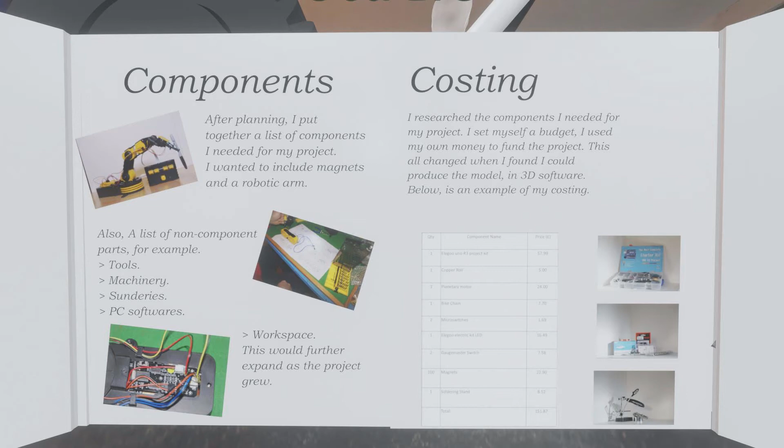Hello, one of my projects is a magnetic raft. I'm going to show you the software I used during this process.

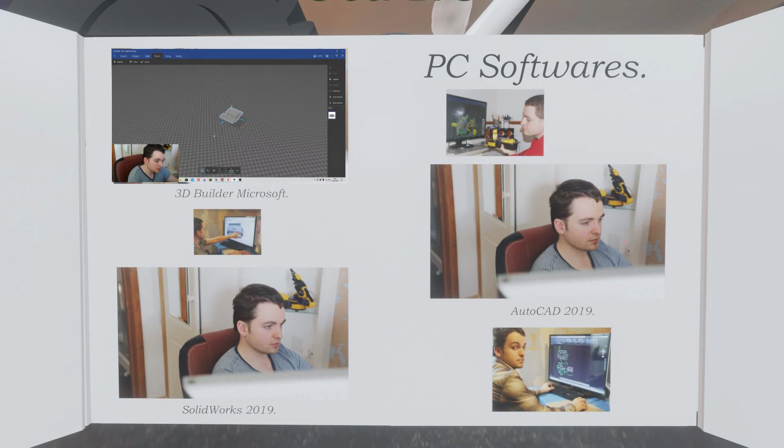This program is free on the Microsoft Store and it is an app that you can easily use, and it's quick and simple. Anyone can use it. You don't have to be technically minded to use it. It's that simple. From here, we used this app to convert all the measurements from the raft. To see this process, visit the link.

Then I'll use CAD. AutoCAD has numerous applications in a wide range of fields. The program can be used for simple projects such as graphs or presentations, or even complex designs. Some other practical applications may include interior designs, aeronautical designs, maps, and architectural designs. To see how this is done, please follow the link.

Then SolidWorks. This is the raft, the bottom part of the raft, where the electromagnetics will pass through on the inside. As you can see, I built it in SolidWorks using minimal tree features, which you can see on the left side. But what this software can do is amazing. From here I can go to simulation and test it, putting it through a series of tests such as static and frequency, and from there I get my results and see if the model is strong enough for the task it will be used for, and then it moves on to manufacturing.

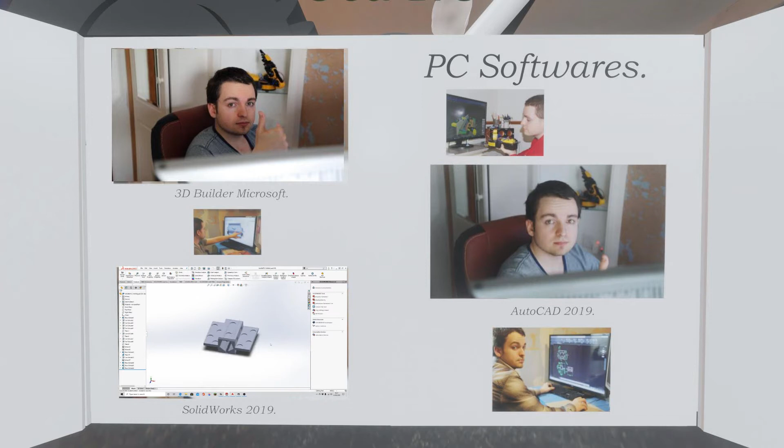This is the model I 3D printed in resin.

Prototyping using 3D printers. BIBO 3D printer. This is the final process for this prototype test model. On the right is the PLA draft model. It can be modified in the slicing software to improve the print quality.

Dremel 3D printer. This is the final process for this prototype test model. On the right is the Eco ABS draft model. It is better with the quality and much stronger compared to PLA. However, it is more expensive.

Elegoo Mars 3D resin printer. This is the final process for this prototype test model. On the right is the grey resin draft model. It is better with the quality and ideal for hobby model making.

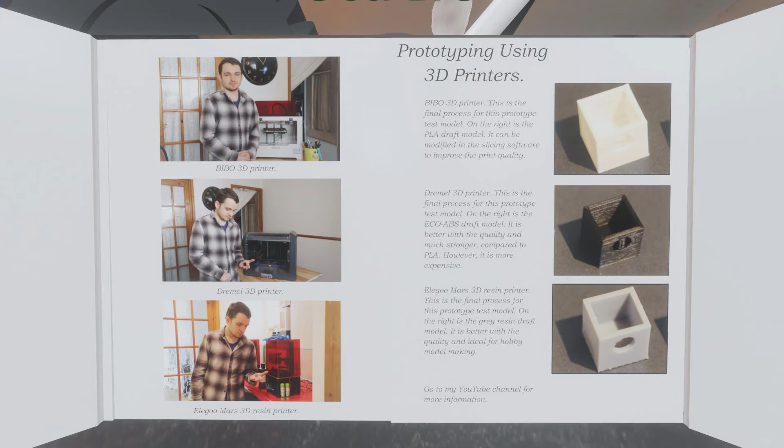Hello, this is my model. I built this using Microsoft's 3D Builder. This model shows the automation in today's industry.

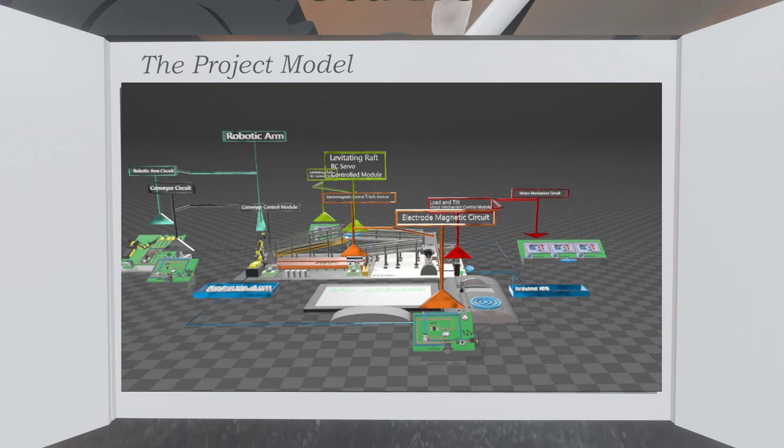I'm now going to break this down into components to show the mechanical side of the model. This is the robotic arm. It will start the process by picking up the barrel and putting it onto the conveyor belt.

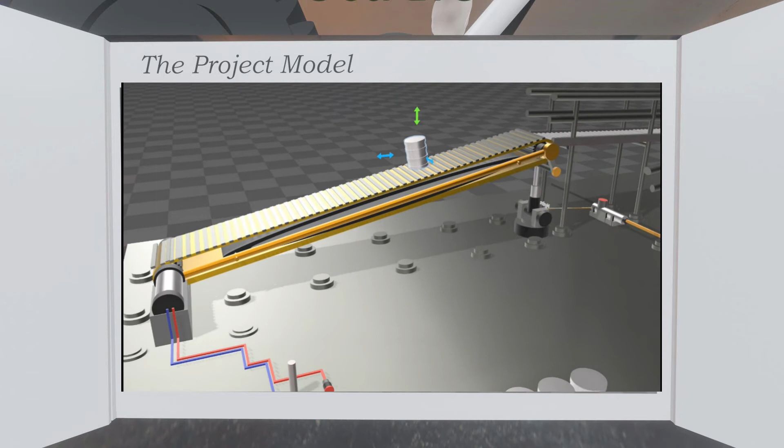This is a cage that protects the motor from the barrel. This is a motorized conveyor. I had a bit of fun here when I was recording this.

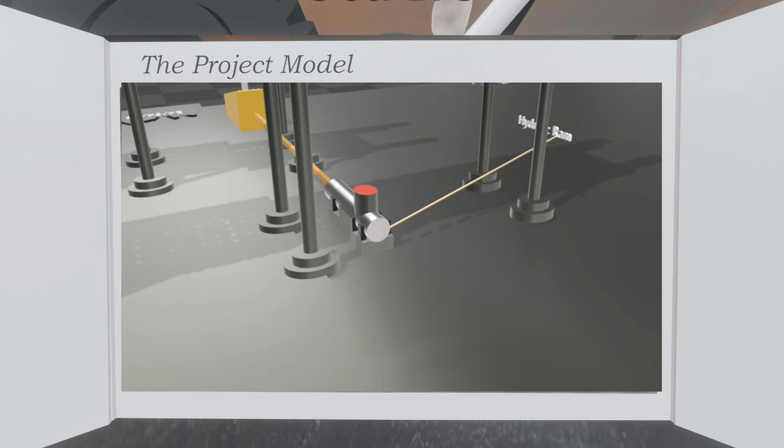This is a hydraulic ram. It adjusts the height of the conveyor belt. This is a hydraulic master cylinder, and this is the mechanism to the master cylinder.

This is a conveyor, it has rollers and uses gravity. This is an automated mechanism.

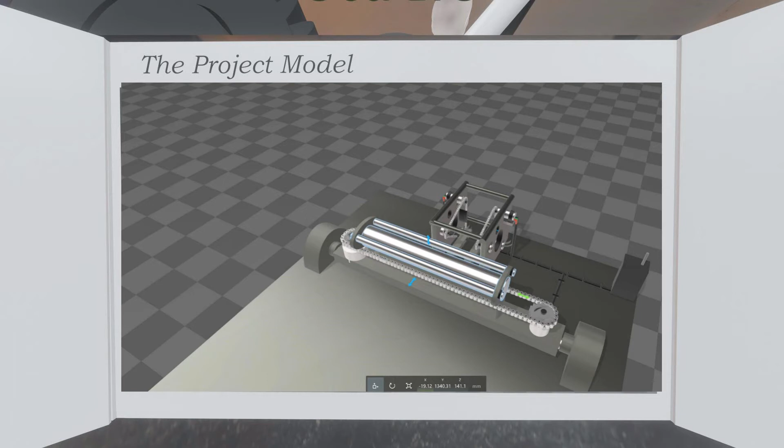The first stage, the barrel is caught into the cage. The cage would then slide along the cylinders. This is done via a chain.

This is the framework, and now this is the tilt mechanism. It tilts the basket 20 degrees.

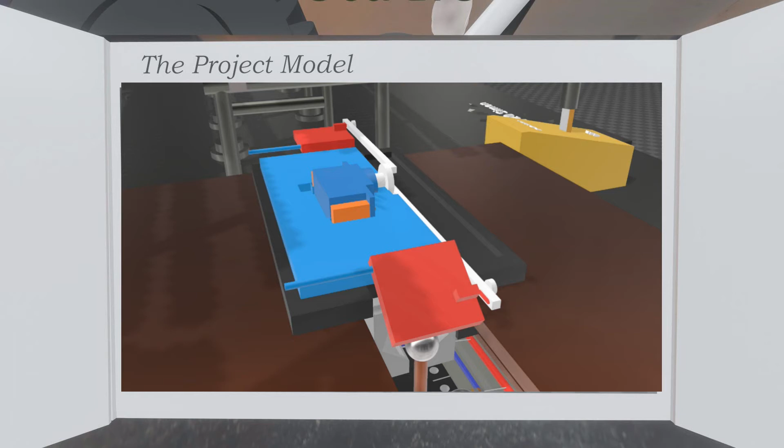This is the levitating raft. It levitates by magnets. How this works I'm going to demonstrate later on the next page. This also includes electromagnetics, which I'll talk about later.

This is the electronics of my model. So the first one is the robotic circuitry for the arm. As you can see, I've given you a side view of the arm and an exploded view of the circuit that is inside. It contains a USB PCB assembly board, and the input voltage is 6 volts.

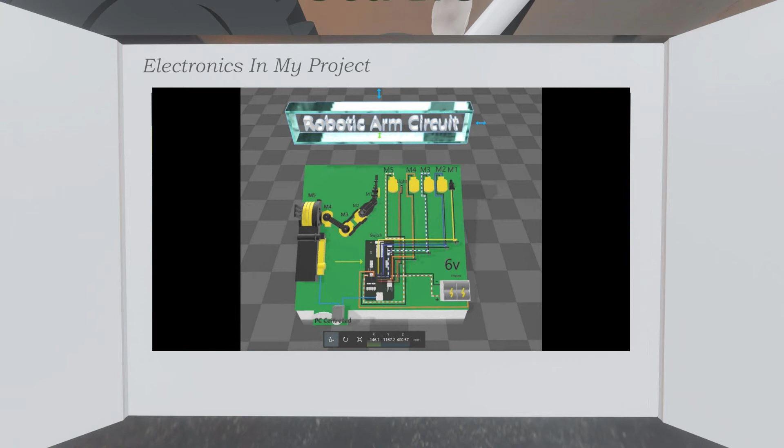And then the output range would be 1 volt to 12 volts, because the motor has a high end of 12 volts.

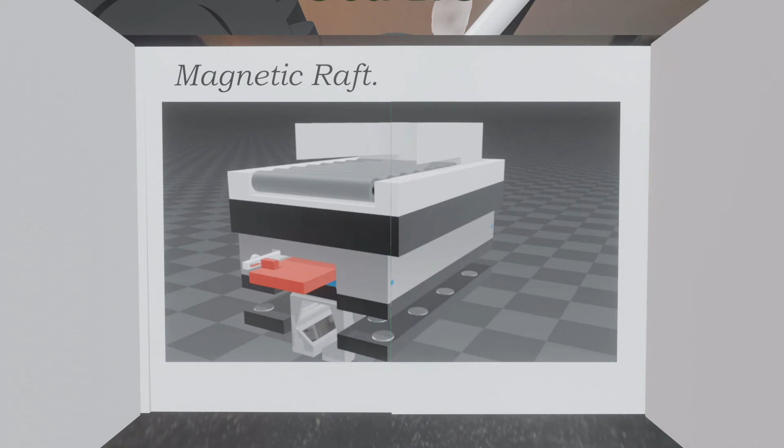I wanted to include magnets in my projects. I did some research, and from my findings I became interested in levitating and superconductive magnets.

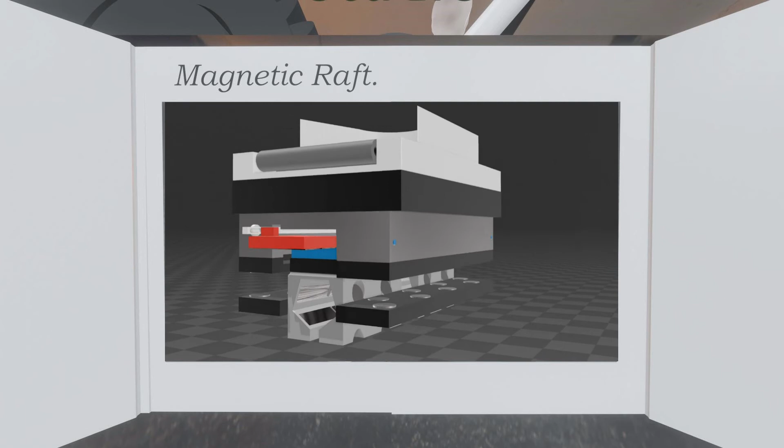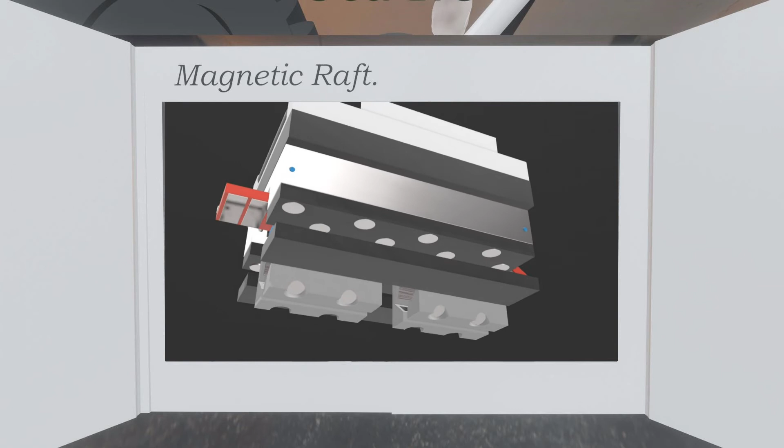This is the raft. As you can see, the raft uses neodymium magnets. The red part is the door with 2 magnets on it, and then you've got the sides which have 8 magnets like little fins, and on the bottom you have these 2 big grey blocks.

These are where the electromagnetic balls go through. This is what stabilizes the raft. The sides keep it level because it's a top heavy raft, as the barrel sits right at the top on the barrel catcher.

As we pan around to the back, you've got the other door and the other side, and you can see the arm sticking right next to the door, the white object - that will connect to a motor on the inside.

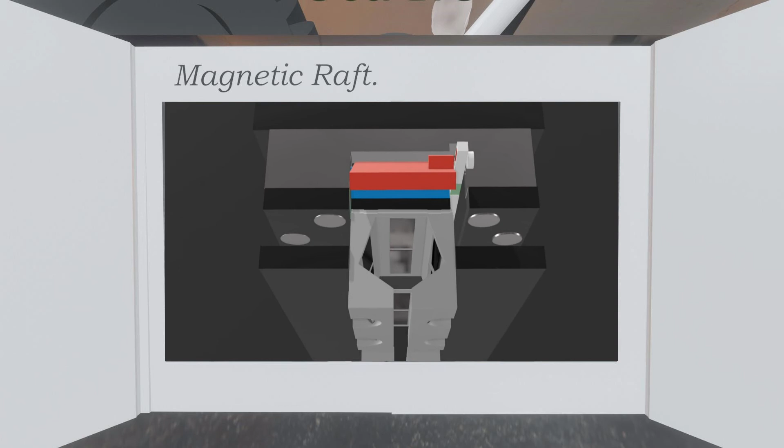As we pan down, you can see directly inside the grey objects - 2 on the top, 2 on the sides, and on the bottom bit where we can't see is 2 more, and this will be mirrored on the other side as well.

This would then glide between the copper sheets on my model. This is the electromagnetic part of my model.

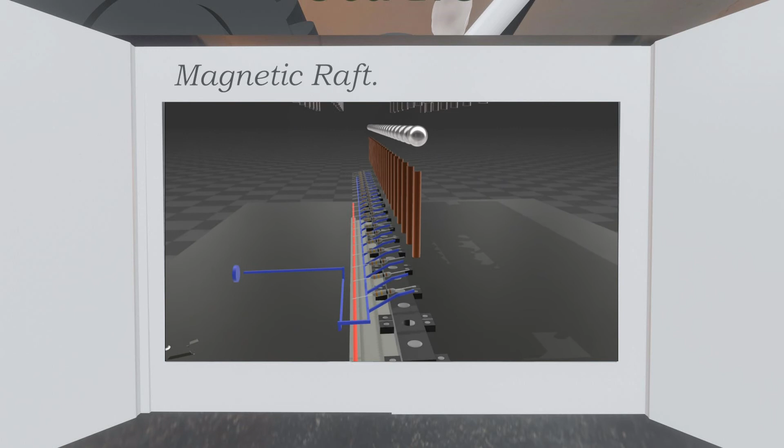Then you've got the copper which is wrapped around the nails, and the metal balls sit on the copper wire. This amplifies the magnetic force.

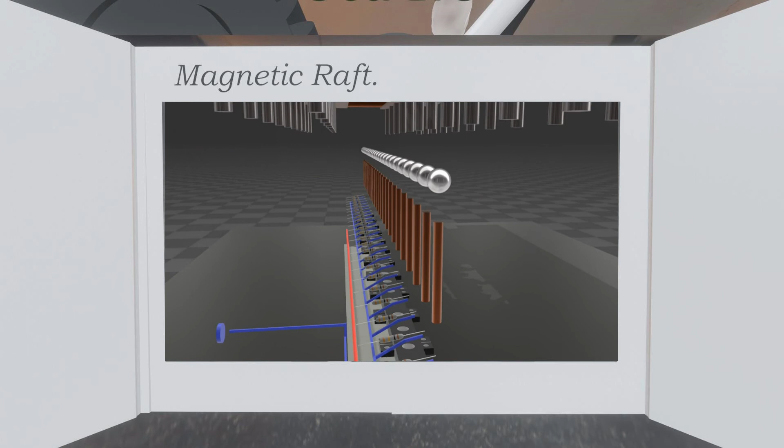Then you have a copper sheet, a resistance sheet, and then another copper sheet, and the magnetic raft would sit on top. This is now the prototype of a raft we printed in resin.

Blender is a free open source animation and modeling software. CyberLink is a pro editing software. MusicMaker - I use this to orchestrate my soundtrack.

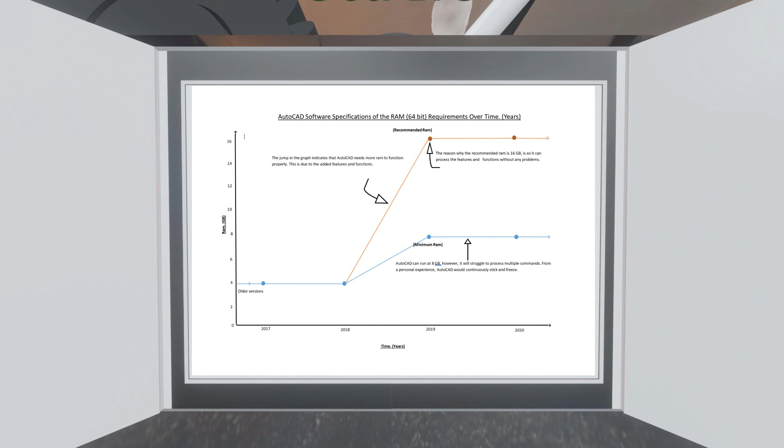And lastly, the circuit. One of the main circuitries in the model, which is the raft, I'm using the software Fritzing to construct my circuits, to give me a visual sight on how and what I can do to them.